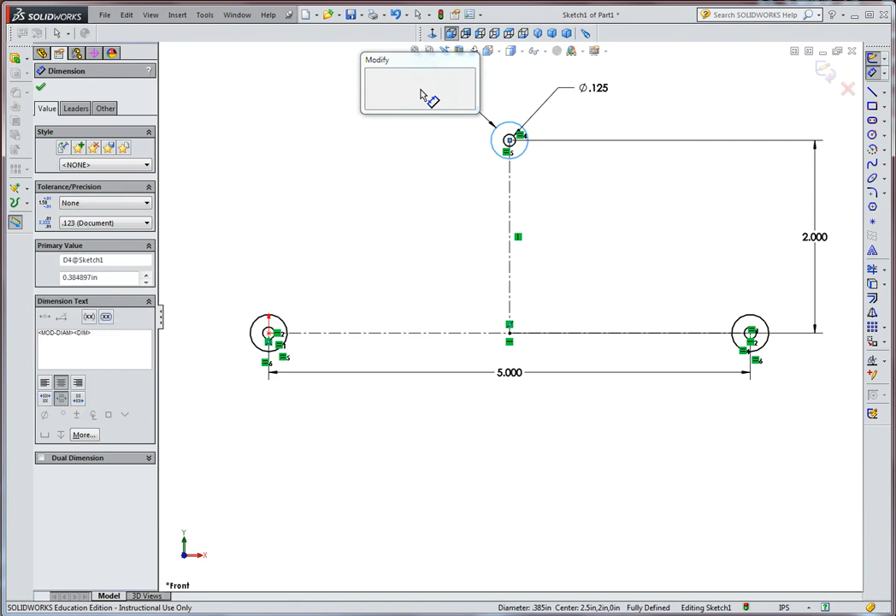So continuing on with this, with the 3-joint link, we're going to put in a diameter on this outer circle. We'll make that 3/8, which is 0.375.

And then we'll put in some lines. And if you adjust this just right, you can see that there's a tangent symbol there. And so in other words, right there and right there, those are constraints that make this line tangent.

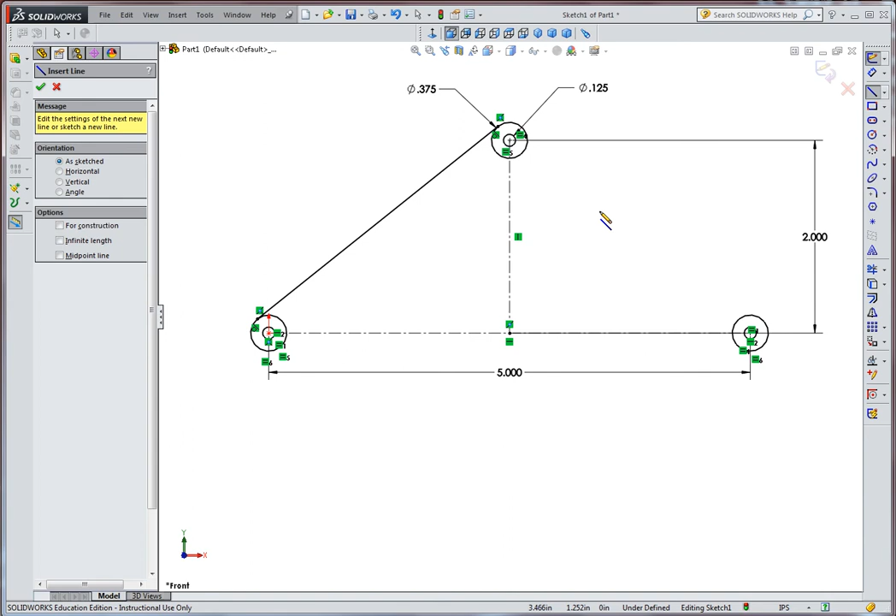So you want to avoid snapping to one of these quadrant points because that will connect it there and it won't be tangent. So what you want to do is just click at some point away from those points. And then as you move this along, you can see it's showing different icons, so you want to pick the one when you see that the tangent icon is there.

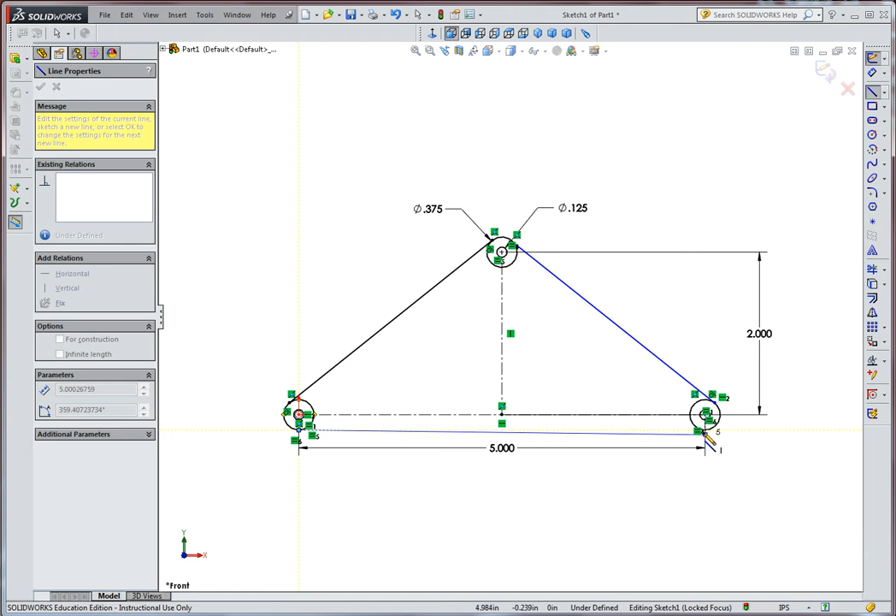This one actually will connect right to the quadrant points because that's where it is in fact tangent. Okay, so tangency there, here, here. Notice that this line is blue. That means that it's not fully constrained, and the reason for that is Solidworks put in a tangency here, but it didn't put in a tangency up here.

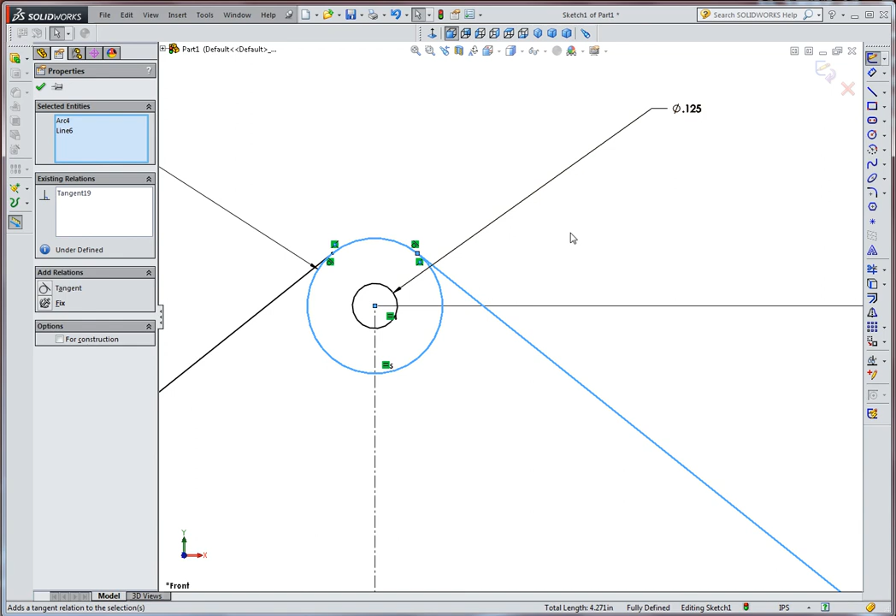Okay, so sometimes if you move that around a little bit, it's connected to that circle, but the tangency isn't popping up. So I'm going to select this line, hold down the control key, and pick that circle, and then click that tangency. And now you can see that it is tangent and it's fully defined.

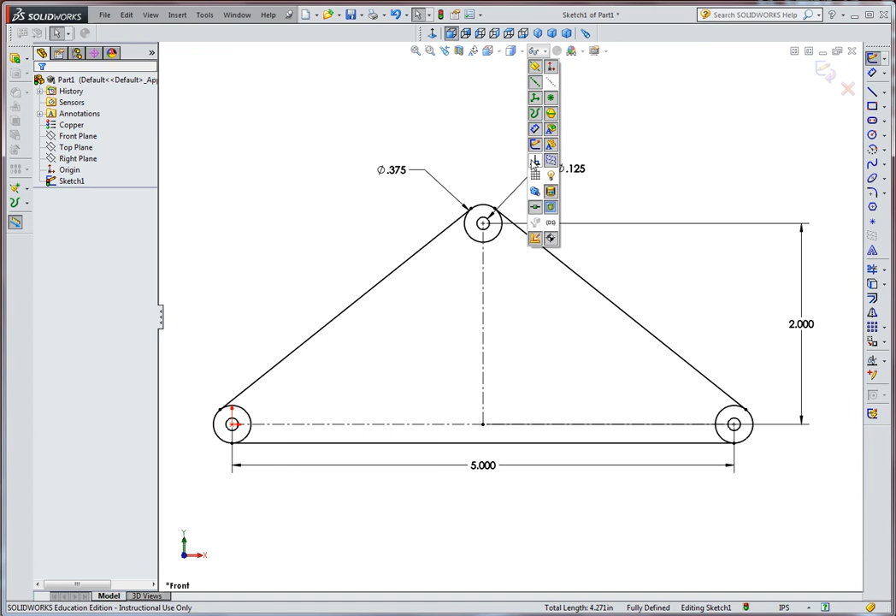Okay, if you don't want to see all these little icons showing you the constraints, you can always hit the eyeglass right there and just turn off the constraint icons. So anyways, down the bottom we see that it's fully defined. We're ready to go ahead and extrude this part. I'm going to turn the visibility back on for those constraints,

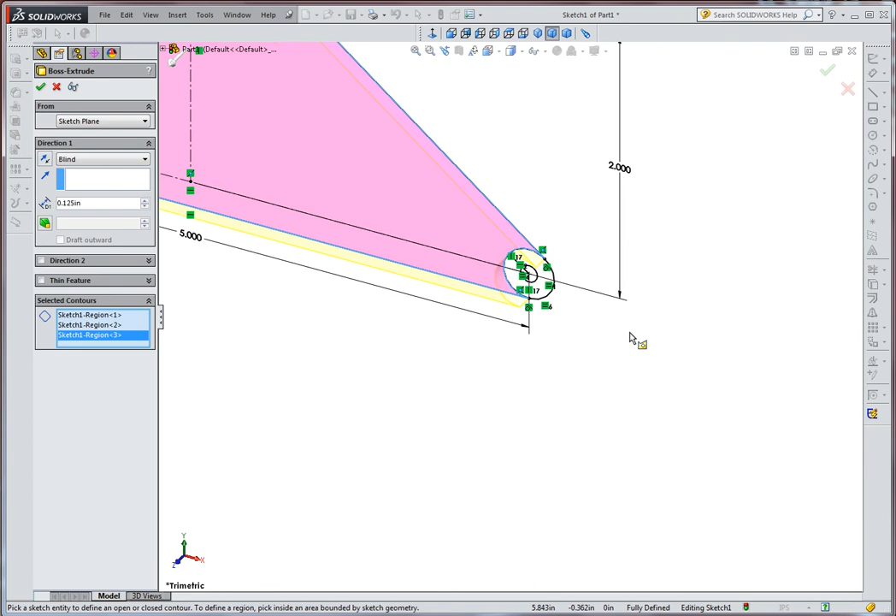and we will extrude this 1/8 of an inch, 0.125, and there's multiple closed contours in this sketch, so that's why Solidworks is asking us to select which contours we want to extrude. So that will be, I want that one, and this one over here. Okay, so now this part is complete.

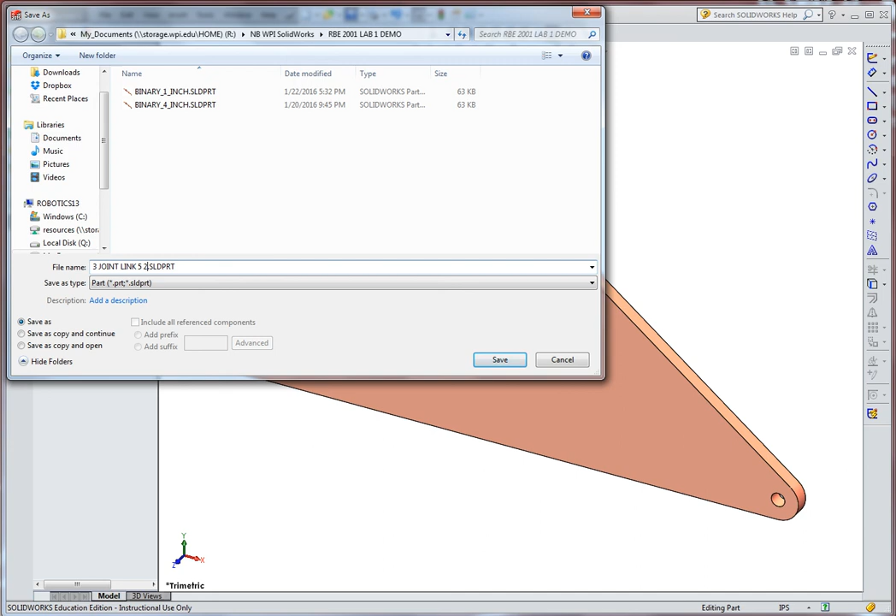So we're going to save this part, and we can call this whatever, 3-joint link, and I'm going to put down 5 and then 2, just as some indication about the distance of the joints. Obviously that would probably be hard for somebody else to interpret, but at least gives me an idea of which 3-joint link we're talking about. So we'll go ahead and save that.

And next I'm going to create a back plate to mount these two. And I think you have the idea now of how to create the part. So I'm going to pause the video, create that part, and then turn the video back on.

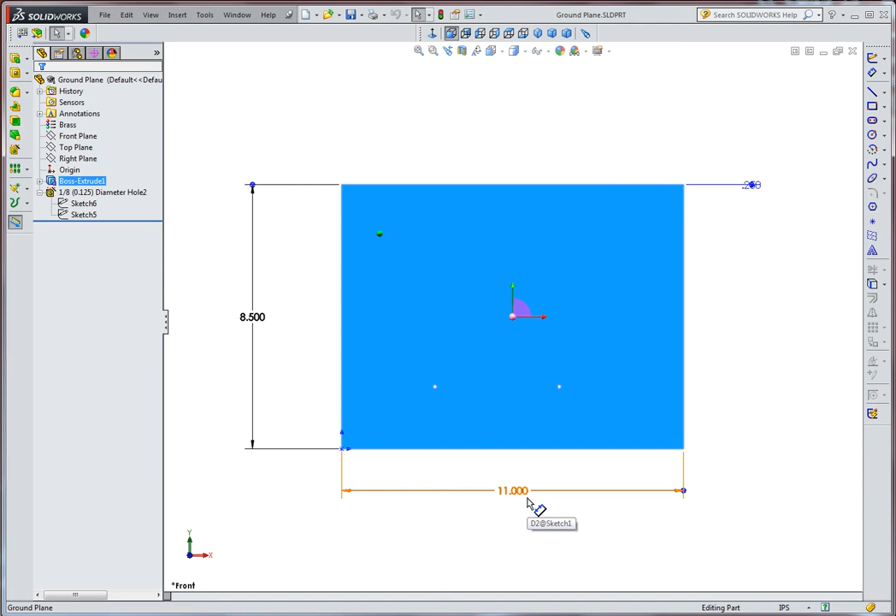So we've created this back plane or ground plane plate. If I click on this, you can see that it's just 8.5 by 11 inches there, and that the hole pattern is just 2 inches high, and then 3 inches over and 7 inches over. So obviously you could rearrange these holes, put as many holes as you want, and we're going to use this in the assembly.

Now the material here is brass. One thing that we pointed out before was that under options and file locations, you can select material database and specify location. So we're going to have our own folder for that.